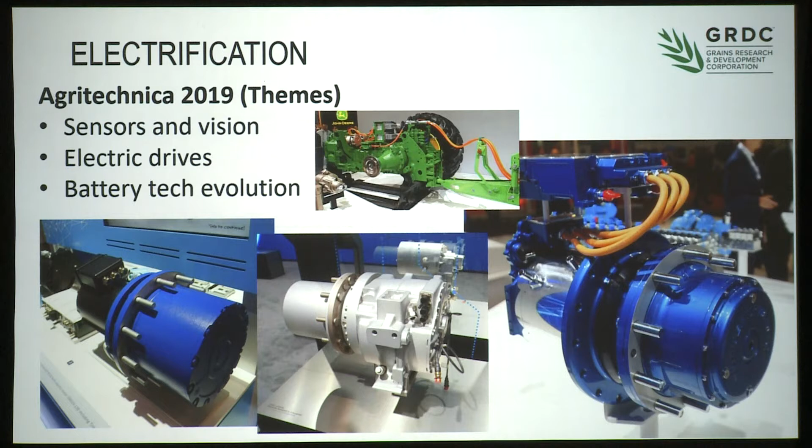So the first question is really, what do we want electrification for? Ultimately, electrification or electric drive lines provide us with ultimate control. We've got 100% torque at 0 RPM, and that might help us with what we're going to talk about next, which is automation. But let's have a look at where we're at with battery powered or electric powered tractors.

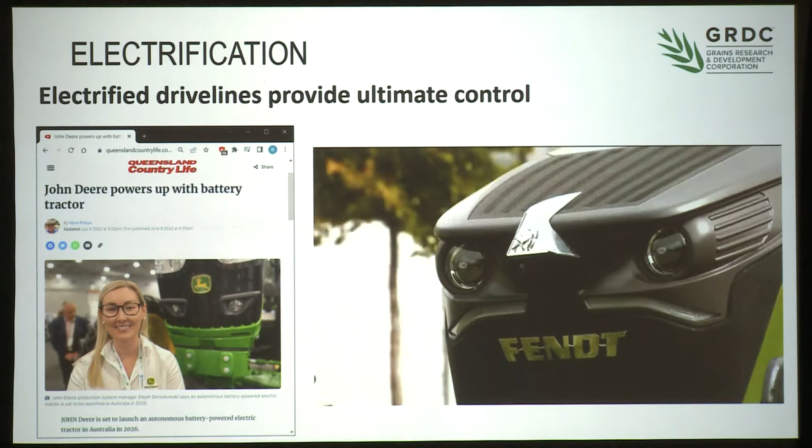We've had John Deere come out just recently and say that they're going to be here in I think it's 2026 with a battery powered tractor. Admittedly, the small sort of format for horticultural purposes, but also we've seen something similar come out from Fendt as well, in that 100 sort of horsepower category.

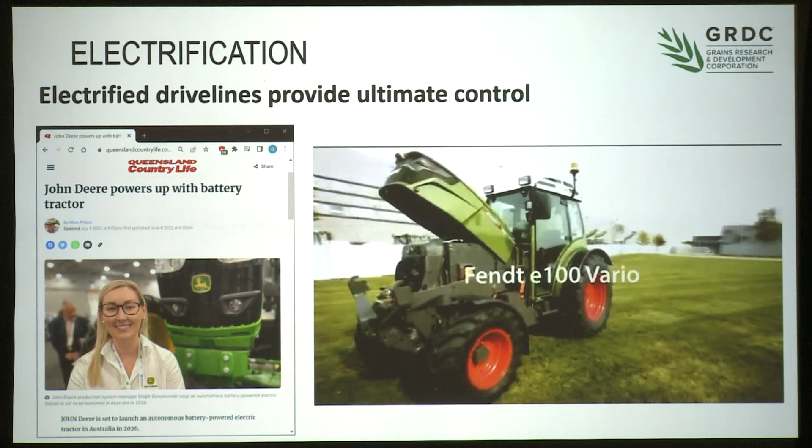Now, the Fendt's pretty small, as I said, about the equivalent of a 100 horsepower tractor. It's got a recharge time up to about 80% with a fast charger in 40 minutes, and I think in about 5 hours it gets to 100% charge.

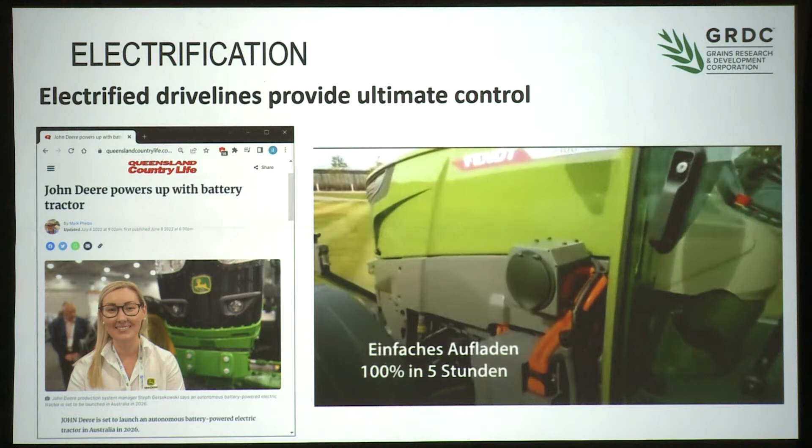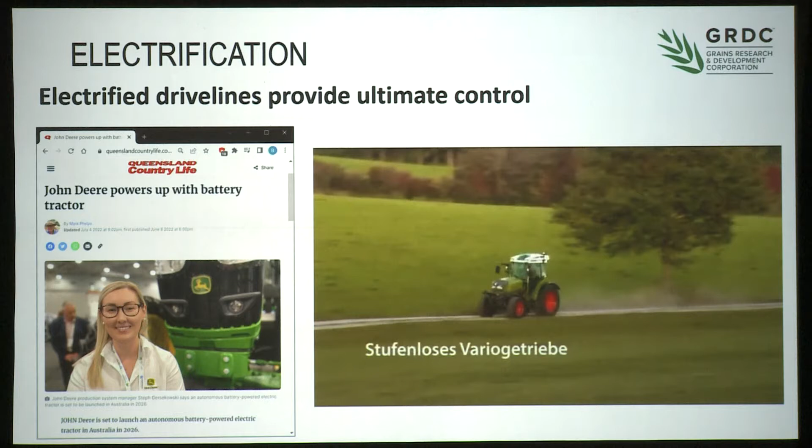So it's all electric drive, you've still got the hydraulic systems there that are integrated, but the charging side of things is interesting in that they've obviously got the high capacity charger that you might see on some electric vehicles as well, but also you can then utilise some of the electric power from the tractor for other implements.

Now, we've also seen electrification of drive lines, and I suppose from the likes of John Deere, we've seen what they're calling an EVT. Now, people might be familiar with the IVT, which is the infinitely variable transmission. The EVT replaces some of the hydraulic components in that drive line with electrics.

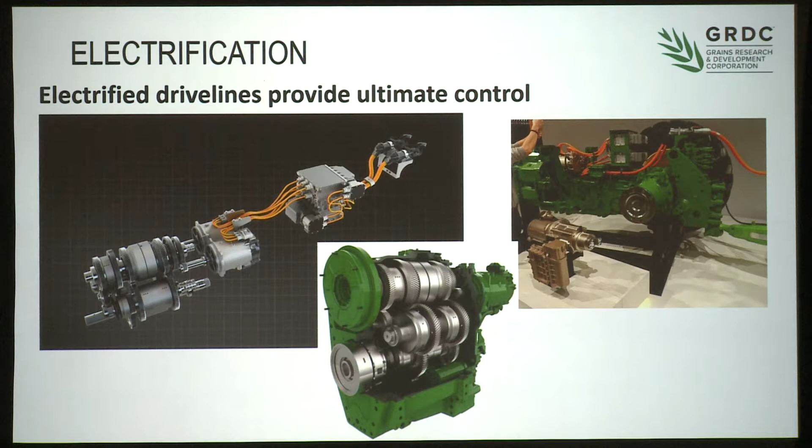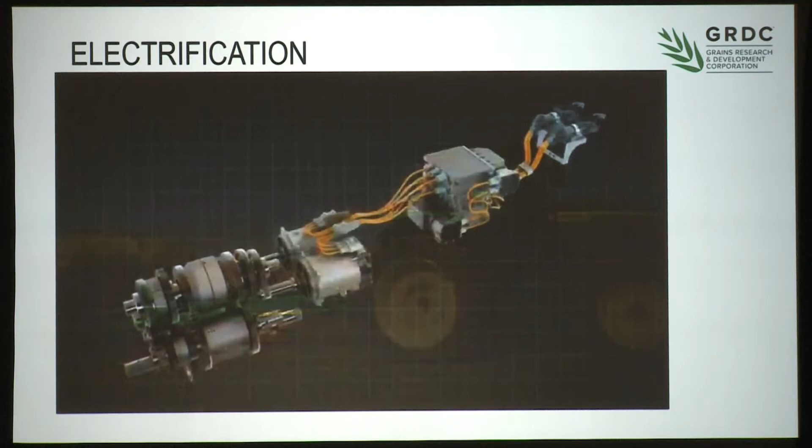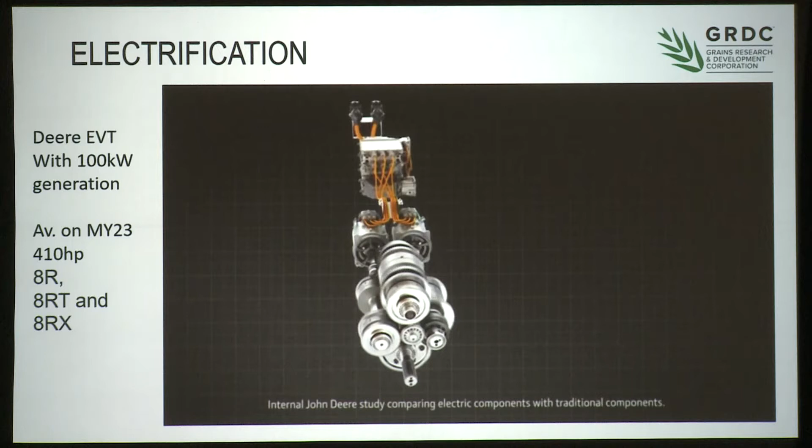So we have a little look at the video here from Deere. You'll see that the two main driveline components that are swapped out from hydraulic to electric sit in the center, they'll be highlighted blue. Electric motors take the place of hydrostatics to deliver seamless and precise performance, plus improved reliability and efficiency compared with other transmissions.

The EVT is the industry's only transmission that can enable electric power generation of up to 100 kilowatts. In the future, you can use this electricity to power implement fan drives, or assist the tractor by powering up the implement's axles to reduce wheel slip, improve uphill performance, and pull wider implements without the need for extra ballast or a larger horsepower tractor.

So a couple of things that are interesting there, one of which is that the electric drive system can also be used to power implements, and that could also be wheel drives. So what we're talking about is not only the tractor pulling an implement anymore, we're talking about the implement also driving itself, having some sort of drive line which hopefully, as you heard there, may reduce the need for ballast and potentially bogging, and it might get us out of some tight spots where we're carrying heavy loads. I'm thinking of things like air carts and also sprayers.

So as you can see, that's going to be available on MY23 410 horsepower 8R, 8RT and 8RX tractors. So this tech is well and truly on the way, and that 100 kilowatt generation is something we've actually seen before.

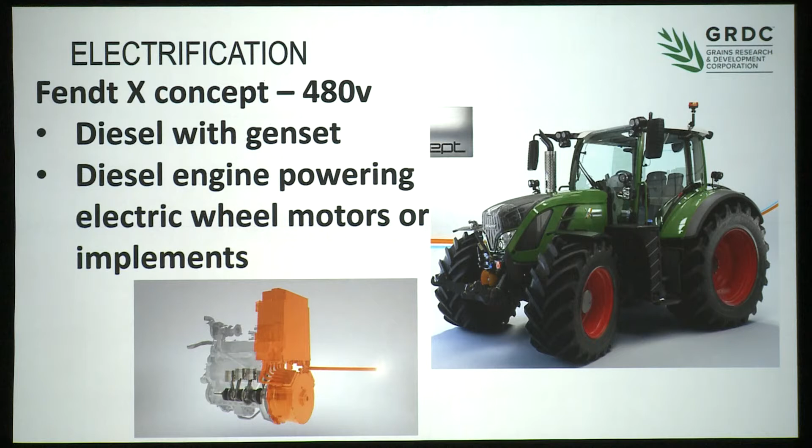So at the back of the tractor, in lieu of hydraulics connecting implements, you can see here a big orange cable which is effectively plugged into the back of the tractor, and that's utilising the power that's generated by the genset.

And just to demonstrate the use of that 480 volt architecture, here's the Fendt X concept, plug in the back, down to a hay rake.

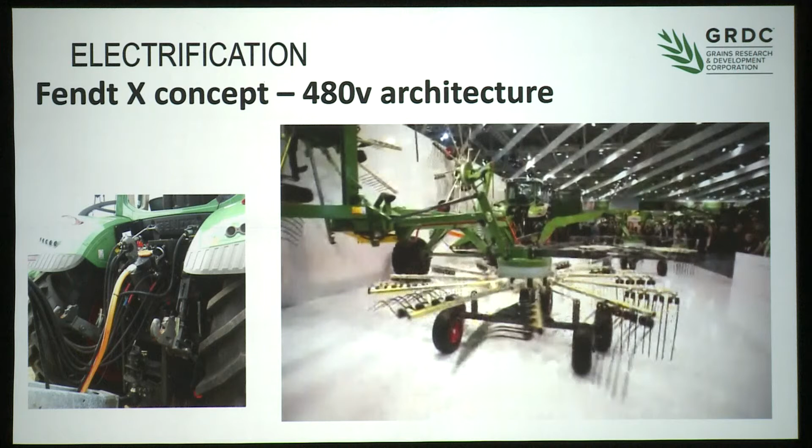So the linkage between autonomy and electrification gets a little bit more clear when we see companies like the Autonomous Tractor Company, which are based in the US, moving away from their focus just on building an autonomous machine, which you can see on the left, that's been around for quite a few years, to what you see on the right. And what they're actually doing now is their primary business is actually taking the likes of SP sprayers, ripping out all the hydraulics and putting electrics into these machines.

So electric wheel motors, electronic transmissions, and a 250 kilowatt generator there to drive the machine along. So they're applying what they've learnt and what they've needed for their automation side of things, and are applying it to existing machines.

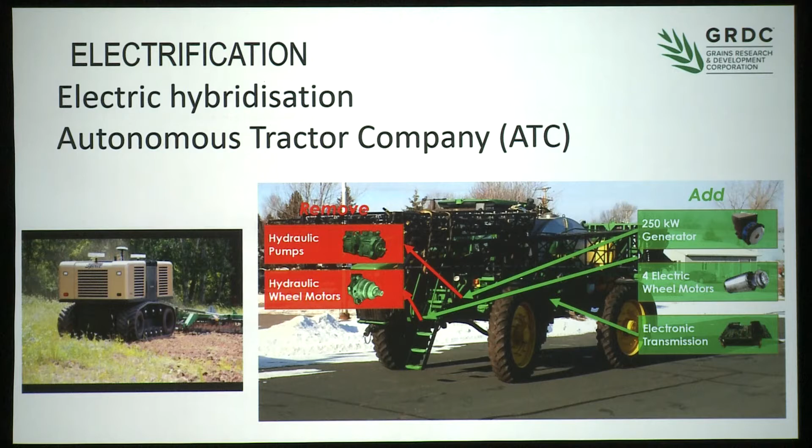Now, one of the things we've got to be a little bit careful of when we get into this technology space is the marketers. They tend to have a pretty good time. They tend to tell us a few things that might not actually be totally, let's say, straight.

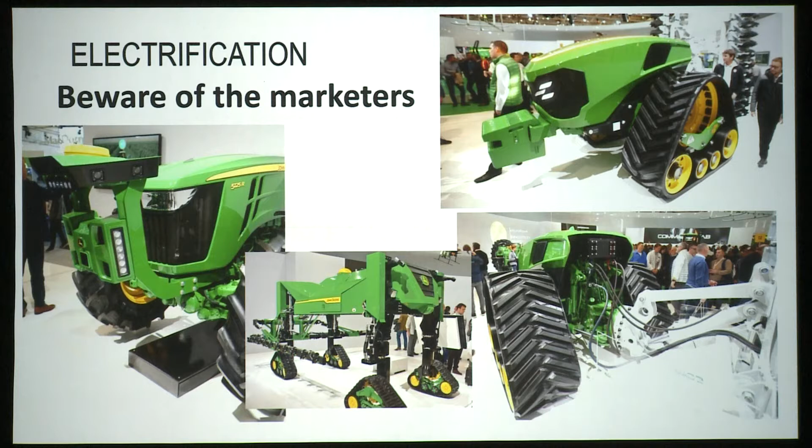And it's illustrated by this fantastic machine that you might have seen in various press and whatnot around the place. So this John Deere track unit, Josh and I were crawling all over it. We're trying to find where the power source is there. Couldn't find it anywhere. Discovered that this video that they were playing at Agritechnica, obviously it drives itself along. There's got to be something there that's driving this.

And at Agritechnica, there was a couple of people hanging around there. There was the marketers, and then some of the technicians as well, and the technicians typically wore the silver jacket. So we spoke to this guy in a silver jacket, and we said, 'Look, what's going on with this machine? We can't work out what the power source is.' And then we found out that the tractor actually had something a little like this on the front. A dirty big cord, which, as you can imagine, doesn't always go well with the likes of tillage implements, as we've seen there. So that left us scratching our head a little bit, and thanks to the marketers, we were probably asking ourselves...

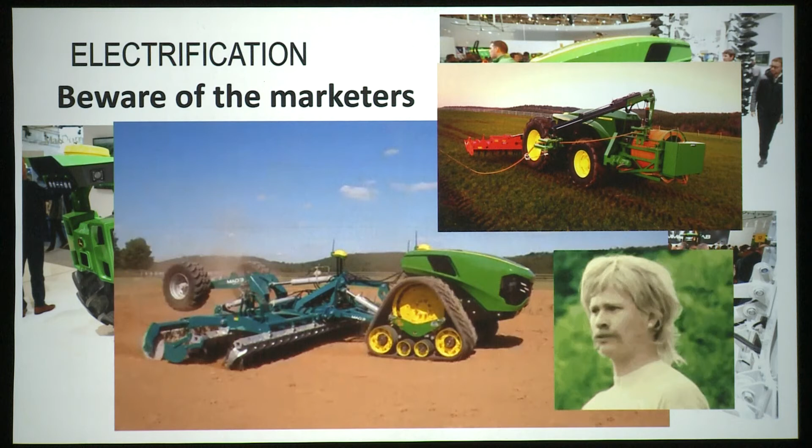Now, electrification has been applied by a whole stack of manufacturers, including Steyr as well. So we're going to probably see, in my opinion, diesel electrics before we see battery-powered tractors. So probably keep an eye out for more developments in that space.

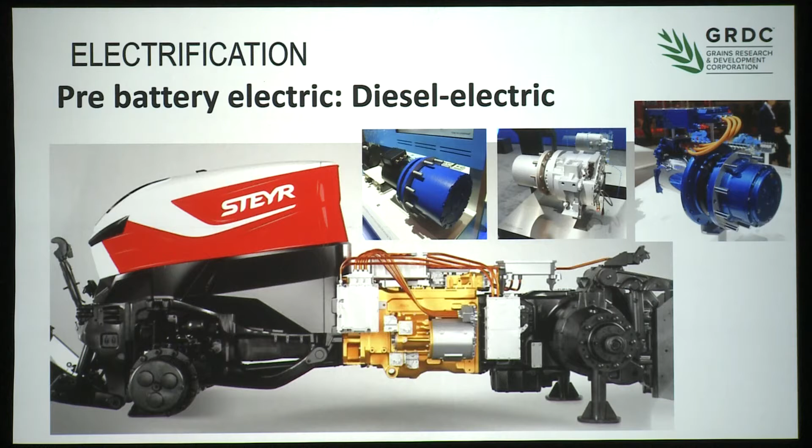So let's move on to autonomy. As I said, it's pretty closely linked to electrification, purely because it gives us quite a bit of control over driveline systems.

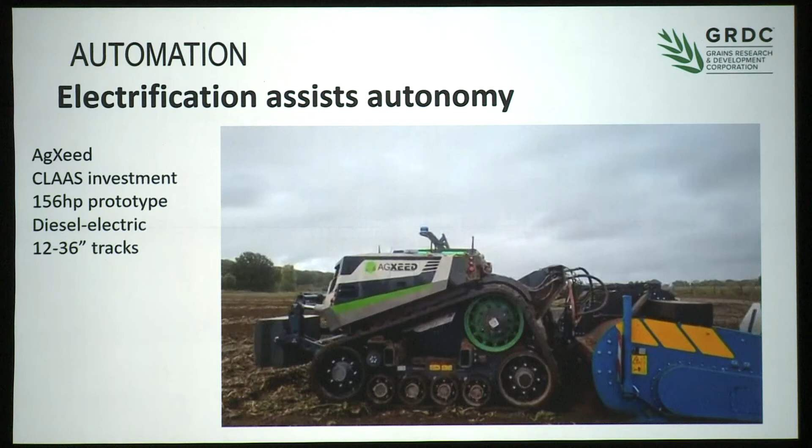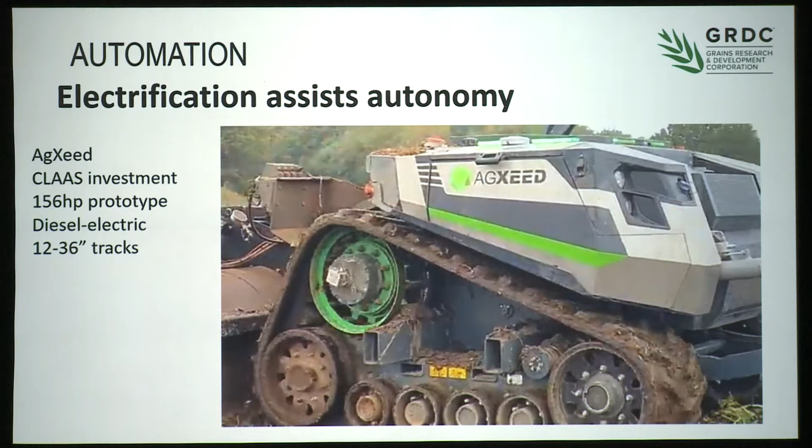Now, I've seen a whole stack of manufacturers get into this automation space, and ultimately, as I said, electrification assists autonomy, and that's illustrated by this unit, which Claas are partly involved in and have made an investment in. It's called the AgXeed. So we're talking about a 156 horsepower prototype. This is on diesel. It's a diesel electric on tracks, but can also be purchased on wheels as well. Standard wheel track spacing, anything up to 3 meters or 3.2 meters, I think it is. So a reasonably flexible platform, and one to probably watch when you've got the likes of Claas backing it.

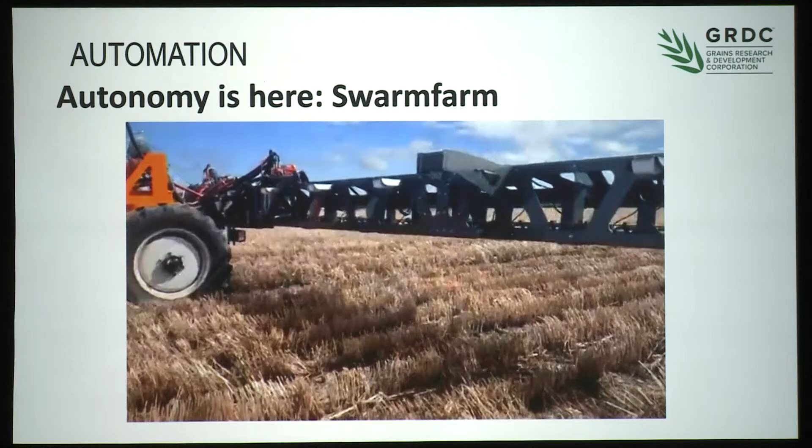Now, autonomy is definitely already here, and we've got the likes of Swarm Farm, which are available for a whole range of stuff. I've seen it pulling turf lawnmowers. I've seen it doing selective spraying, as it is here. And the Swarm Farm journey continues to evolve. The guys are up to about their 29th machine out in the field now. It's a slightly different ownership model, if you like. Here we're seeing the automation paired up with selective spraying technology.

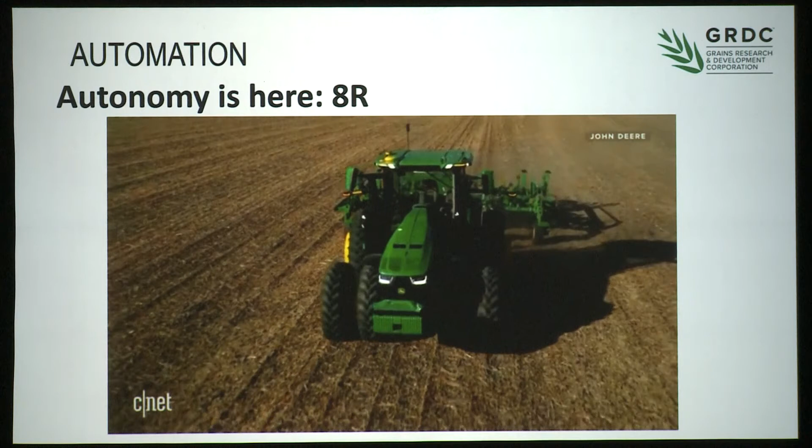So here's the 8R from Deere operating completely autonomously. No one in the cab, but of course any of these machines require eyes and ears. So the eyes in this case on the Deere autonomous platform are the 6 cameras mounted at the front, just above the weight stack there, and then also at the rear of the cab. So that does a couple of things. That gives the tractor eyes so it can detect obstacles in front of it and stop if required, but also gives remote operators the opportunity to tap in and see what's going on and check the machine performance.

So obviously connectivity is very important, and that's something that's going to be really essential for us when we get down the automation path. So the evolution of automation is being driven pretty hard by the major OEMs, smaller OEMs, as well as the researchers. And pretty much any university that's operating in an ag tech space has got its finger in an automation pie somewhere. That list probably continues 3 screens down. It's absolutely huge. So the amount of investment and I guess effort in the automation space is pretty massive.

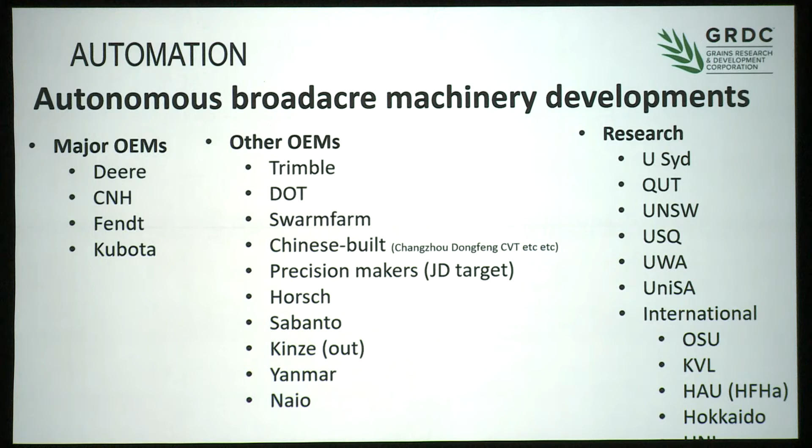So the other thing I wanted to talk about today was input application precision. Now, inputs are getting increasingly expensive, whether that's fuel or fertilizer. We need to be as precise with application of inputs as we possibly can and get maximum efficacy out of those. Things like chemistry, we know we can do a lot better job. So let's have a look at some of the technology that's starting to evolve in that space.

All right, so let's have a look at the first application, and obviously green on green selective spraying is the first thing that comes to mind when we talk about being precise with inputs and potentially saving ourselves a fair bit of money. So this is a Bilberry system spraying ryegrass out in canola.

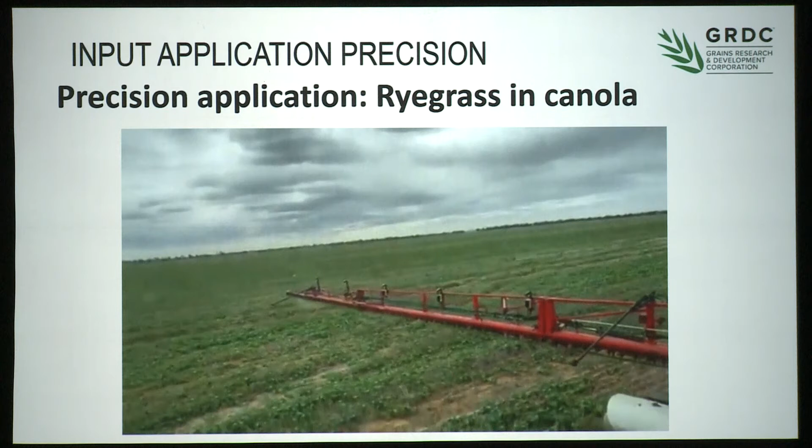And if we have a look here, this is also green on green. This is spraying broadleafs out in cereals at 24 k's an hour. So if you have a look at the screen on the right, have a look at down the bottom of that monitor, and you'll see the green weeds feeding into the system as the cameras detect it, and then obviously triggering the sprays.

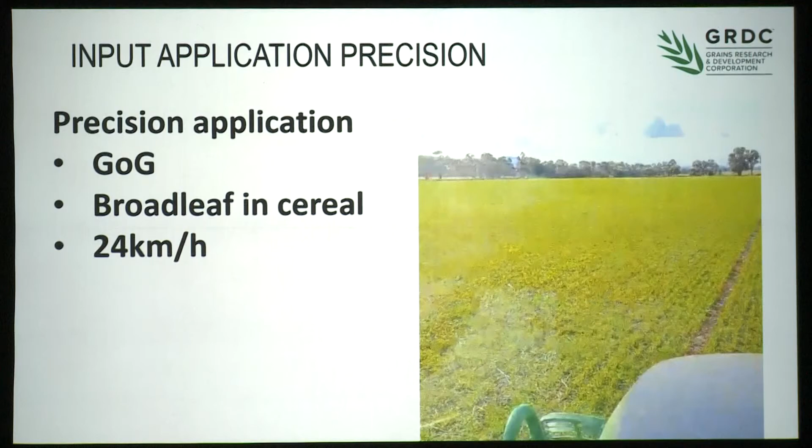Again, this is a Bilberry system, green on green, as I mentioned, broadleafs in cereals.

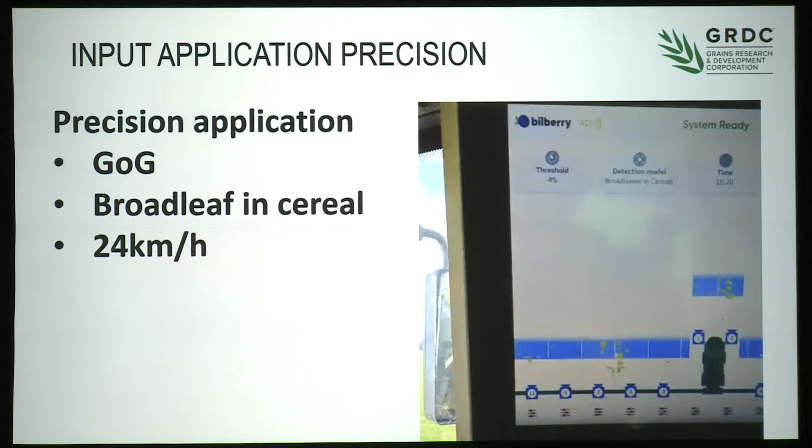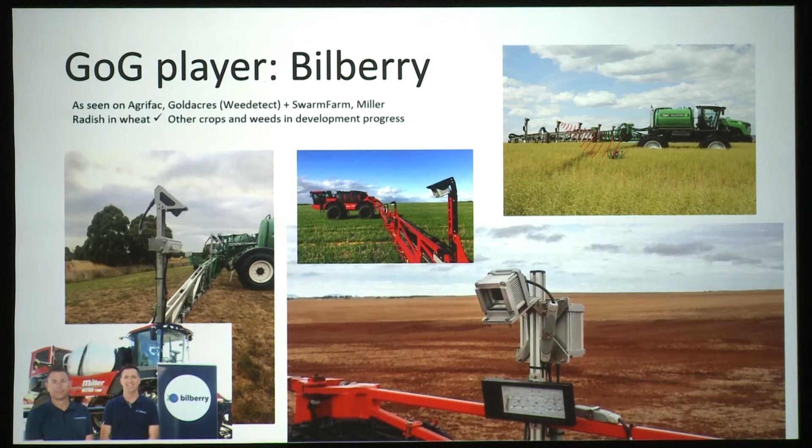So let's have a look at some of the players in the green on green space. We've got the likes of Bilberry, as I've mentioned, and those two examples that I've shown you have come from them. They're working with Goldacres, Miller, and AgriFac, and they're continuing to evolve the algorithm development, and also looking for different weeds in different crops, which will continue to evolve. So utilising the same technology, it's just a matter of getting the algorithms right to pick up the weeds in a given environment.

John Deere See and Spray Ultimate, adopting the Blue River technology they bought a few years ago, are currently doing green on brown and green on green here now for soy and cotton crops. And I expect in the not too distant future we'll see other crops and other weeds pop into the algorithm space there for John Deere. Quite small cameras on their booms, a lot more numerous, I suppose, than some of the other systems.

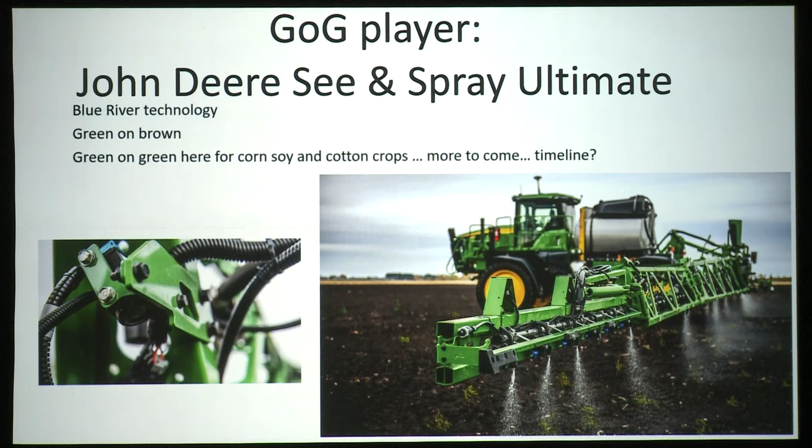We've got Hardi GeoSelect, so using pretty high resolution cameras to pre-fly a paddock, detect the weeds once that data has come in, or once that imagery has come in, and generating an application map, and then allowing sprayers to go out and target particular weeds with particular herbicides.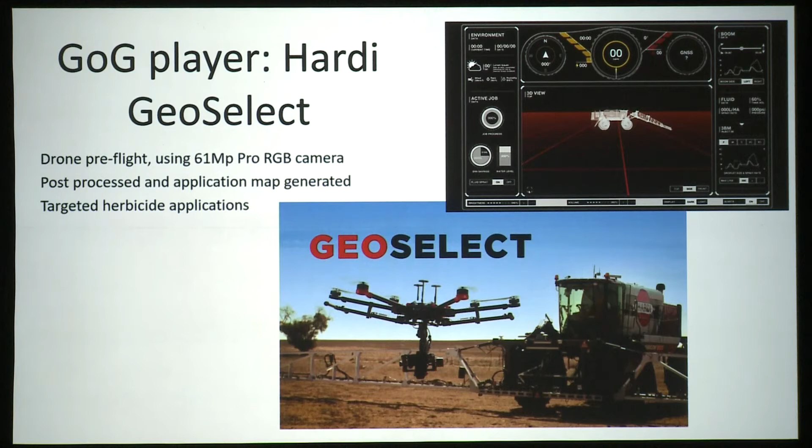And then of course we've got Hardi, as well as their 3S spot spray system, which is from EXXACT Robotics. So they're talking about spraying working day and night at ground speeds of up to 25 k's an hour.

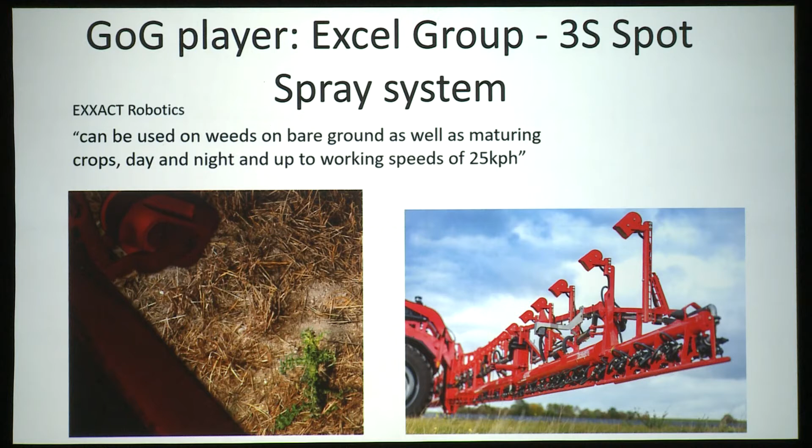Also, we saw at Agritechnica a few years ago, and it's continued to evolve, this Bosch BASF Amazone setup, the Xarvio, which can run a couple of different spray lines, detecting different weeds in different crops.

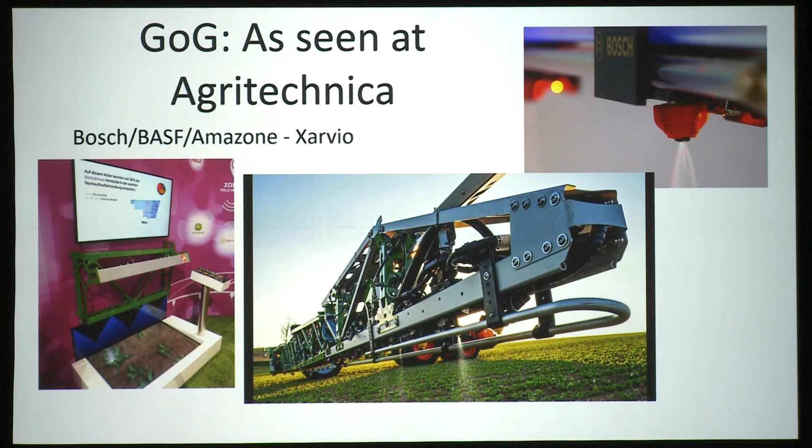We've also got the green on green from Carbon Bee, which is the AI-Spray, and so they've got backing of a major OEM in Kuhn. Green-eye technology, another one.

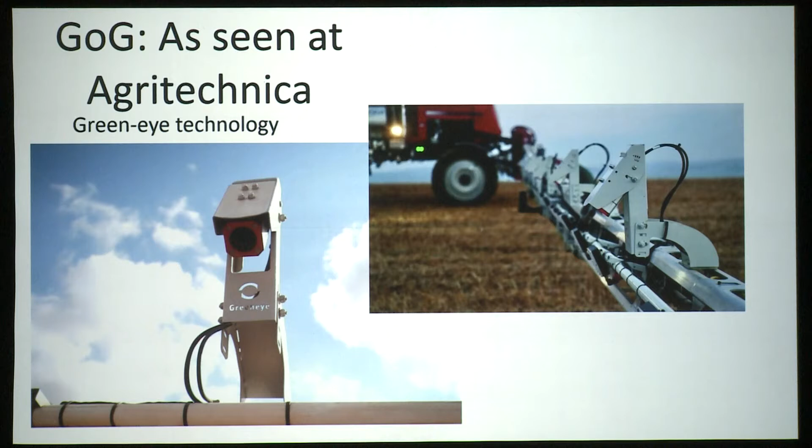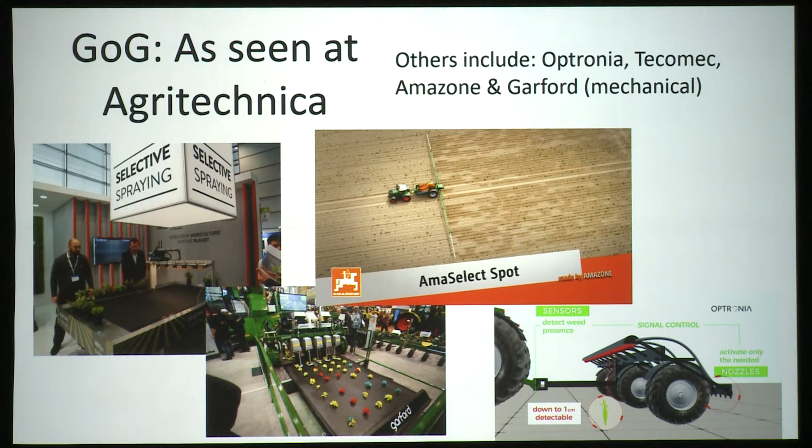There's a stack of these things starting to evolve, and what that tells me is there'll probably be some consolidation and sharing of technology at some stage, which would be great for the end user. And there's a stack of others as well: Optronia, Tecomec, Amazone, and Garford, which is actually a mechanical setup. So look, continue to see these selective spraying setups, and I imagine that with time some of the technologies will be integrated and also perhaps consolidated into a more standardised format.

We've also got Open Weed Locator, which is from Guy Coleman, working in that open source sort of space. And I think what Guy's doing here is really great. It means that anyone has access to the technology that's developed, and you can see his developed spray system here, top left-hand corner.

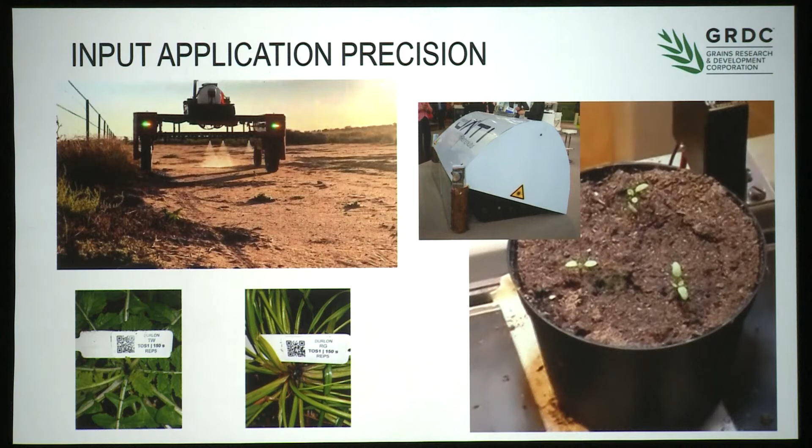And I suppose the other point to make with any of this sort of technology is that while it's being used to spray, there's potentially the option of integrating other technologies, and that might be the likes of laser. And it's always great to see weeds literally smoking and dead. If nothing else, this tech will give farmers great joy and warm the cockles of their hearts seeing smoke rising up off weeds that have been destroyed by laser. Nothing better.

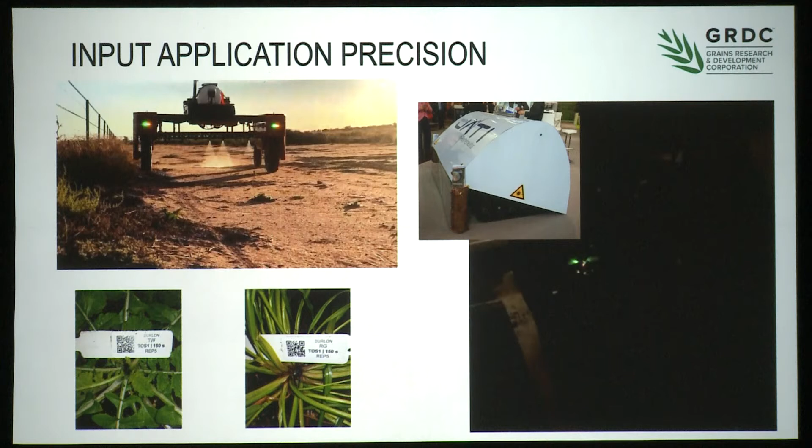With fertiliser being so expensive, making sure our application rates are right is pretty important. This is a piece of technology from Amazone that measures the amount of material falling on the spinner plates 200 times a second, adjusting the gate every 25 kgs of product delivery. This gives a pretty good idea of exactly how much product is going in the paddock, and makes sure that if there's too much going on, the gate is adjusted to get back to the target application rate.

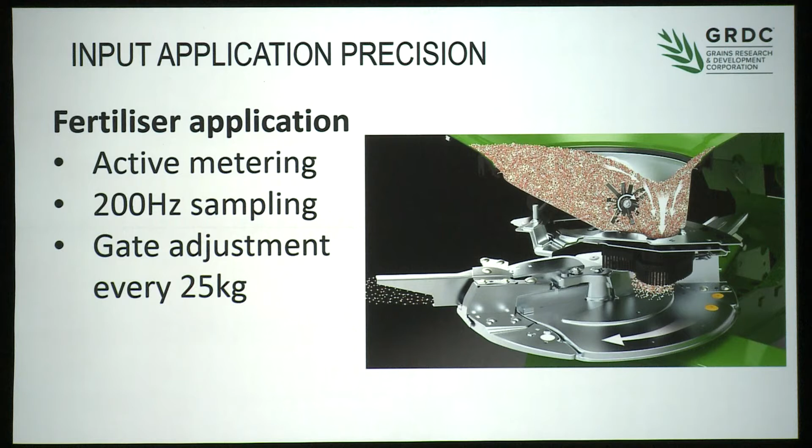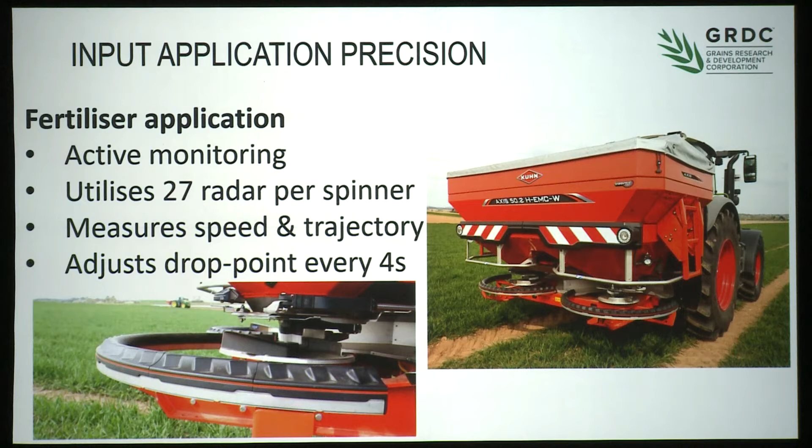So we move on to our final point, which is machine format diversity. What I'm talking about here is looking at different machine formats for different jobs, thinking a little outside the square, in the same way manufacturers have thought differently about automation and utilised different scales or platforms. Let's have a look at what some manufacturers are doing in this space to make sure the machine we're using is most suitable for the job at hand.

Task suitability is what this is all about. In some instances we might see small formats - let's say swarms, whether tractors or smaller units like drones - employed to work together to apply product or perform a particular task in the most efficient way possible.

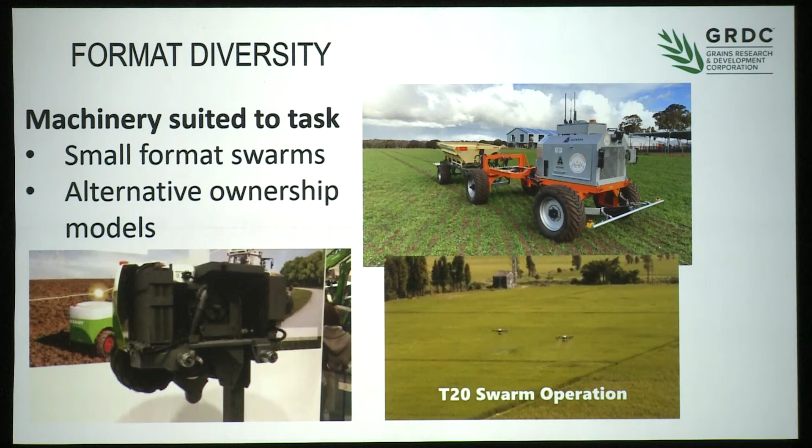So what we've got here is a couple of examples of swarm machines. The bottom left is the little Fendt unit specifically for seeding. We've got the SwarmFarm tractor up top, the robot that can be used for everything from spraying to spreading. There's talk of seeding and tillage as well in small format arrangements. And down the bottom you've got the T20 swarm drones. So all examples of small machines working together collaboratively to get the job done.

Now it's at this point I've got to tell you about this machine that I walked past in my 6 years at the University of Southern Queensland. It was at the entrance to the engineering building, and we looked at it every day, and it continued to gather cobwebs and a whole heap of dust. We're talking about what's called a gantry tractor. The idea is that you minimise compaction. It was a concept that floated around in the 50s, 60s, 70s, and continued to evolve but never really got there - that is, until quite recently.

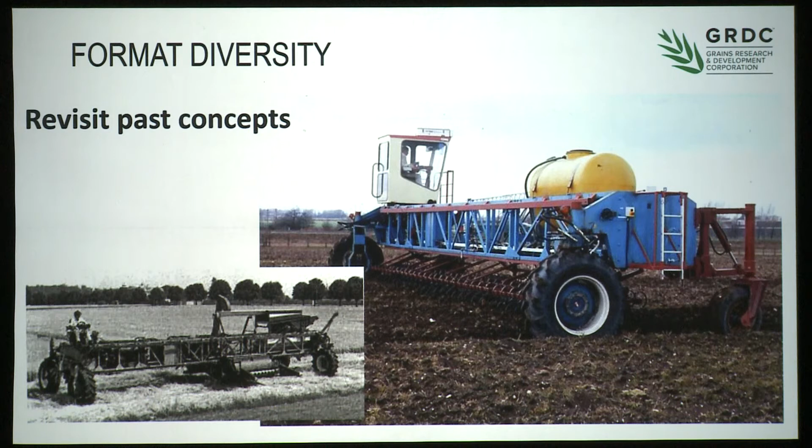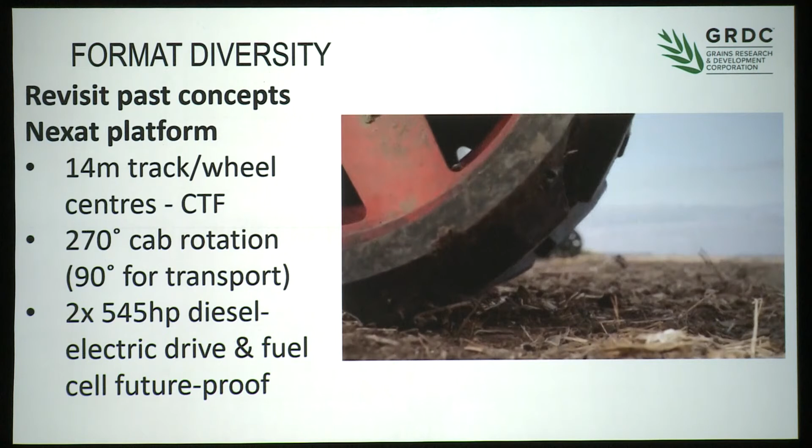So this is the Nexat. It's a 14-metre track centre gantry machine, effectively a toolbar that a whole heap of stuff can bolt to - whether that's tillage equipment, sprayers, harvesters, as you can see here. The Nexat's been developed as a toolbar, and I dare say there'll be a stack of other implements designed and built that'll complement the Nexat format in the future.

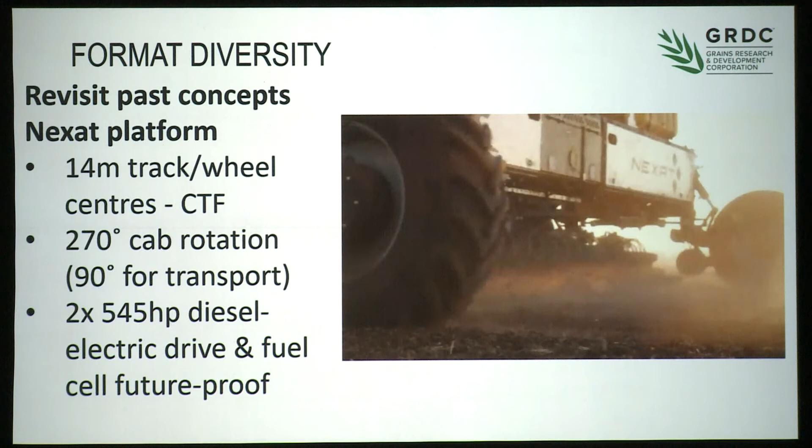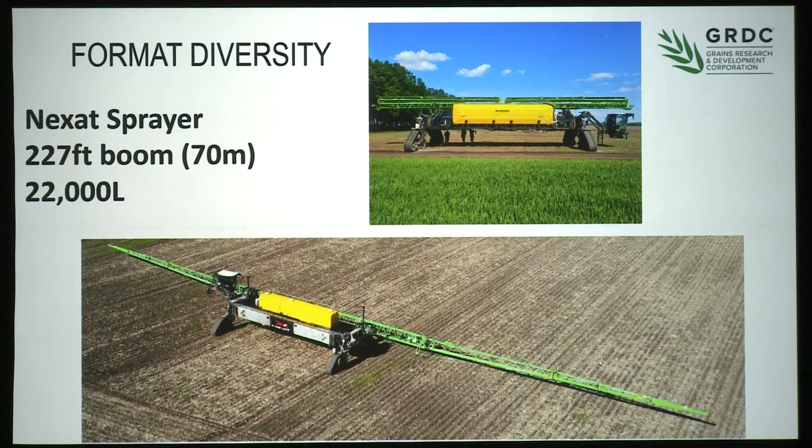So what we're talking about here is a 227 foot, that's 70-metre boom, 22,000 litre sprayer. Same base format, but it becomes a toolbar that everything else bolts onto. So that's a pretty massive sprayer.

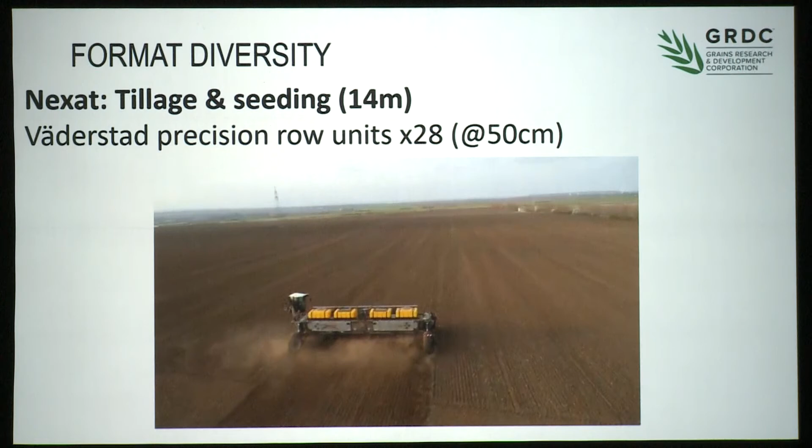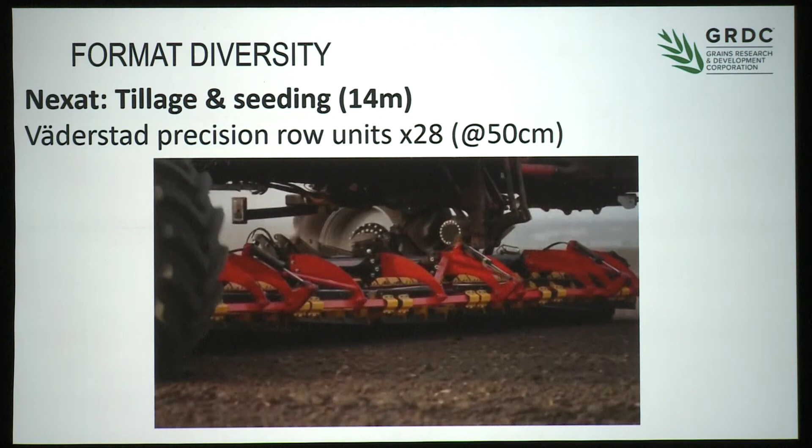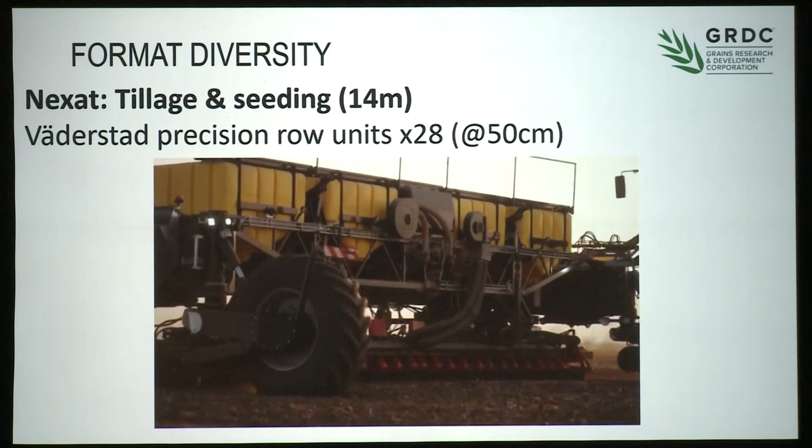One of the things the Nexat team has done is partner up with other manufacturers to develop the tools that bolt to their toolbar. In this case, we've got Väderstad, both tillage and seeding equipment. One of the units running around - or a pair of units - has 28 Väderstad precision row units at 50 centimetre spacings. I understand these two are operating in some part of Ukraine, and interestingly you'll also note these two machines are running on wheels, not tracks like the other units shown - just demonstrating some more versatility in that respect.

And to complete the picture here, a harvester using a Geringhoff front. It's a pretty impressive machine.

What we're talking about is 130 to 200 tonnes an hour, a 5.8 metre axial rotor mounted in the transverse plane. The grain bin, 36,000 litres, and 600 litres a second outload. So yeah, different format, different way of thinking about it, and obviously some pretty huge horsepower that generates quite a bit of productivity. So it'll be interesting to see how this format evolves.

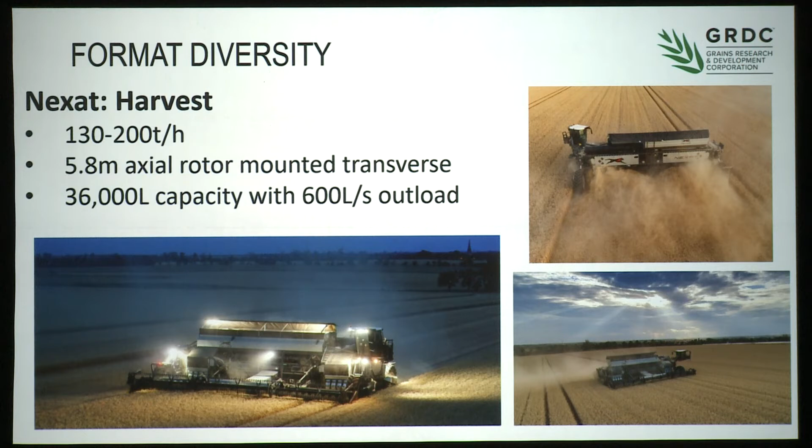Nexat aren't the only people working on an alternative gantry style format. Here we've got the RO24G from Horsch that's only just been released, and in fact this unit is apparently off to Brazil to do some soybean work. What you'll notice is that we're employing both that alternative, almost gantry sort of style format, but in this case pairing it up with autonomy as well.

And knowing Horsch, knowing that they develop a whole heap of gear including sprayers, I wouldn't be surprised if we see something come from them in the not too distant future that maybe has some spray equipment on it as well, utilising that sort of common toolbar platform that they've employed here with the RO24G.

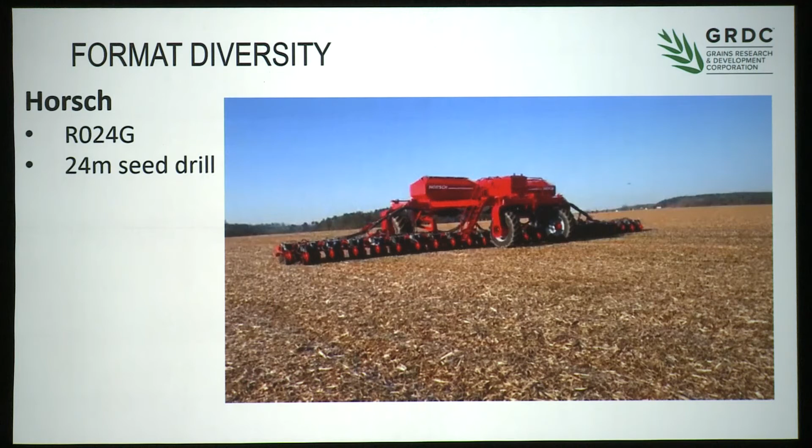So that brings us to the end of what I'd hoped to talk to you about today, and we'll head off to some questions. So with that, we'll throw it open to the gods of technology, and I'll hopefully jump on a Zoom and be able to take any questions. So if you've got any questions you've jotted down, feel free to ask me now, and I'll have a crack at either answering them or making something up that sounds plausible. My contact details are there as well if anyone wants to get in touch.

Thank you so much, Ben. That's a great way to finish the day, because I know everyone loves to look at the machinery and certainly what's coming up. I still want one of those little Fendt tractors that you showed at the front. That's one of my things.

Question from Dan at the front. Hey Ben. Hey Ben, Daniel Birch here. Ben, I was speaking to a dealer just recently about green on green, and they were saying that every second sprayer quote they're putting out is with green on green, and it's being picked up a lot in the northern ag region. What are your thoughts on where it's at with commercialisation and reliability?

I think it'll continue to evolve. I think it's probably demonstrated reasonable reliability already, particularly in that northern ag region. I think there's probably some owners there that have worked pretty hard with manufacturers to help that process, and I think we've got to acknowledge the growers that are investing that time, because ultimately it's for the good of the industry. So look, Dan, as I said before, there's going to always be an evolution. Are you going to be at the bleeding edge still? Possibly, yeah. But you've also got some large players coming through that'll both encourage competition and also foster more rapid development. So I can see why the quotes are being done that way, because the technology is there. The actual hardware is probably not going to change too much, but the algorithms that sit behind it may. So yeah, that'll be where the evolution happens.